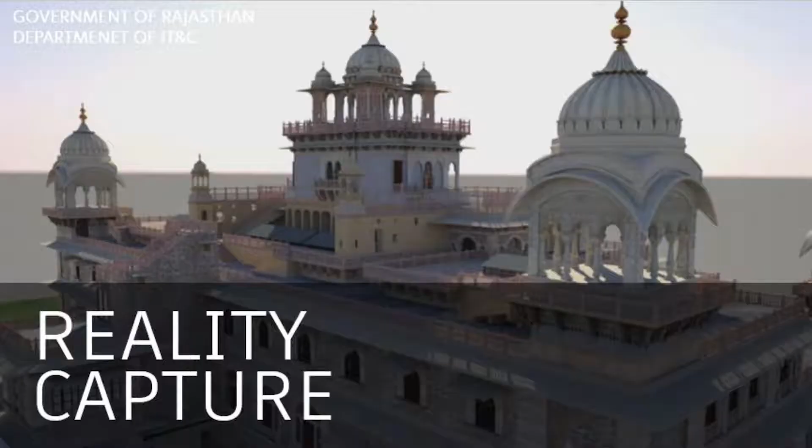Our lives became digital. From entertainment to communication to medical to bank, everything is online, everything is digitized. And since recently, we managed to also digitize the physical world around us.

The first devices were laser scanners. You know how it works - it spins and shoots laser beams in space. It hits the first surface, registers the XYZ coordinates, brings it back into the machine, and we have something called the point cloud. These machines used to cost almost $1 million, $600,000-$700,000. Now you can buy the most advanced laser scanner for $60,000-$70,000.

That's quite a democratization. Then we have a myriad of new types of scanners - there's Tango, there's Kinect, there's structured light, blue light, white light scanners. All of them help us digitize the physical world around us.

And then we have photogrammetry, the process of taking photos, simple 2D photos with your phone, with any camera. And if you took enough photos of an object or of a space, it automatically, through an algorithm on the cloud, converts into a 3D digital model.

Now, could you have modeled this statue? Of course you could, but you'd need to be an expert in Max or Maya. You would need a couple of weeks at least to do it. And it would never be the actual digital copy of the object - it would be an interpretation. This is the actual digital replica of the object that you took.

So we started with laser scanning in AutoCAD a couple of years ago, and it looked like this. It was black and white, it was not understandable, and it was killing AutoCAD. You put it in AutoCAD, and AutoCAD was going like this - it's like, what happened to me? I cannot work anymore, because it was not prepared to consume this type of point cloud and this type of data.

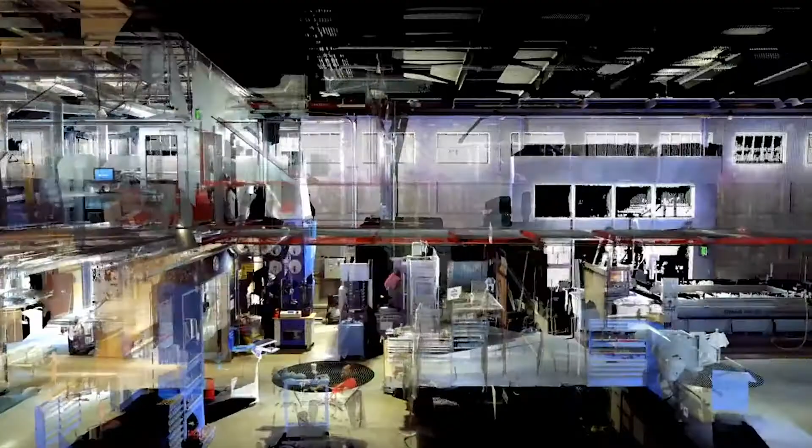That very object, that very scan, looks like this now. Both sensors have become better, but most importantly, the software has become better. And now we have the ability to use laser scanning and photogrammetry to capture either existing spaces, to represent the data in many different formats, to auto-register the scans. All these things that were really a pain to do before are almost a single-click thing.

And if all of that was not enough, we live in an age of drones. You can fly a drone without even thinking about it - it follows you like a dog without a leash. In the clouds, and basically we can fly it to capture just about anything.

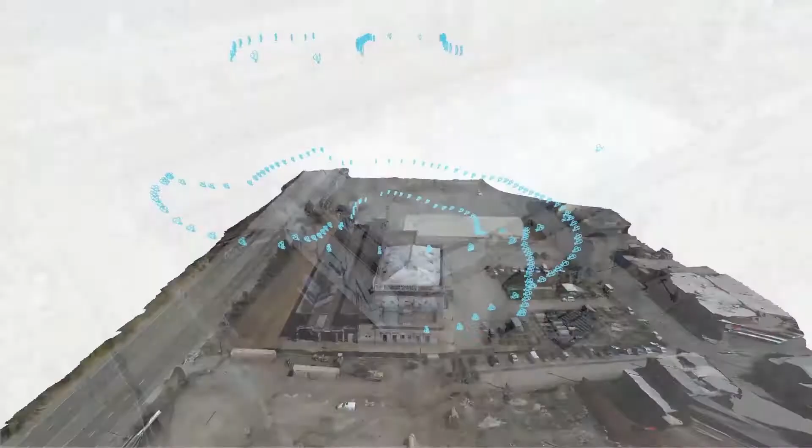Earlier, we had to remodel everything on the street, all the surrounding buildings, in order to start designing the new building. Well, now we don't have to. I fly two rounds of drone capture, and here is what I have. Now this is my starting point, and from here on, I actually focus on the task at hand and not on reconstructing.

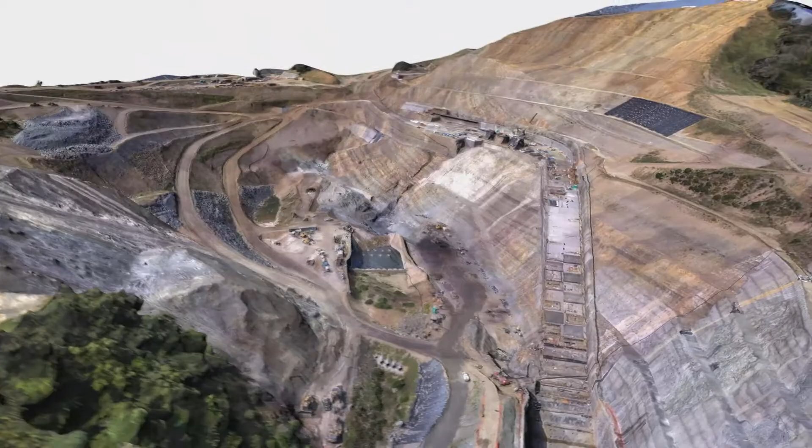Or if I'm in civil engineering, again, I fly the drone. I can calculate how much earth do I need to excavate, how the access points will be for the first trucks, etc. And this is not only interesting for when we plan new buildings.

It's also a good way to save our heritage. We're losing our heritage due to terrorist attacks, due to earthquakes, tsunamis, and it will be beautiful for the future generations to keep an archive of what we have.

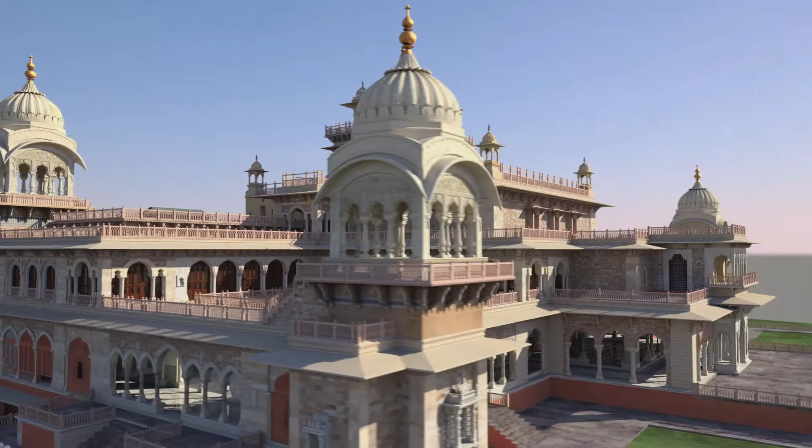The government of Rajasthan has started to do digitization of all their beautiful palaces. And their idea is not only to use this for saving an archive for future generations, maybe for future digital tourism, but also as a help to go towards smart cities.

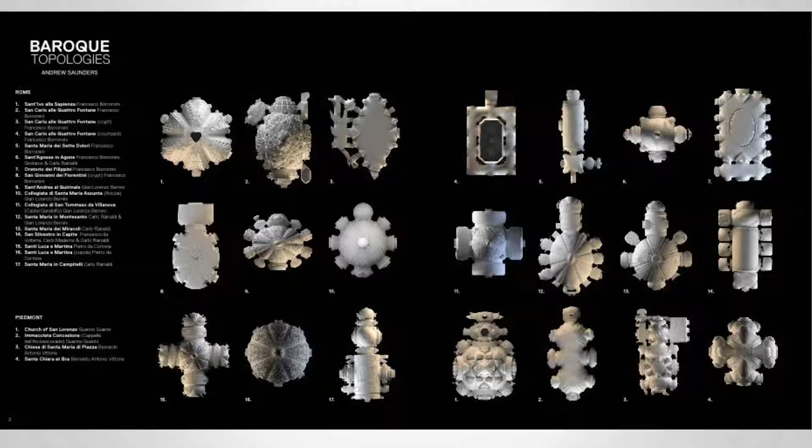In the gallery, you also saw a Baroque topology exhibition. I was working on this with Professor Saunders, who teaches Baroque architecture. If you're an architect like me, you know we learned all the complex architecture from floor plans and sections. But Baroque architecture is this beautiful combination of sculpture, painting and architecture, so it's not really understandable if you learn it from just sections and floor plans. So Professor Saunders said, I will try to use all of this technology to teach my students properly to understand Baroque.

They picked about 20 of the most important churches from the Italian Baroque. In Italy, they went with the students, scanned the churches, and created these unbelievably beautiful captures of the churches that you can experience online. You can look in detail.

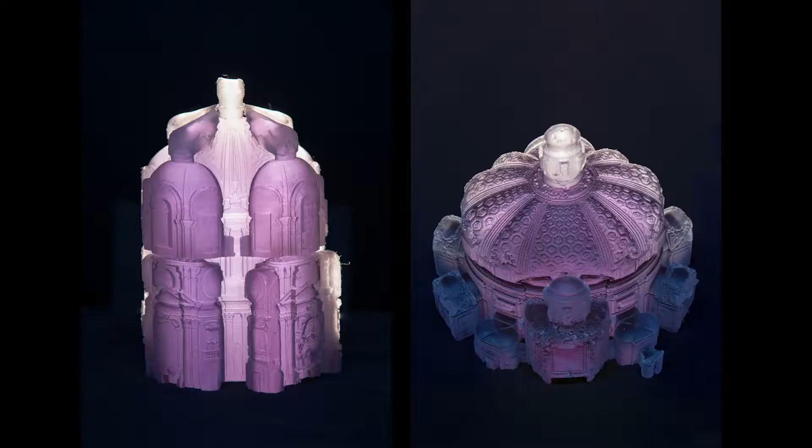We made 3D prints. Now, these are not prints of the outside of the church. Rather, imagine that you're filling up a church with water, then you freeze the water, and you break the church, and what remains is this sculpture. So this is actually the positive of the negative space.

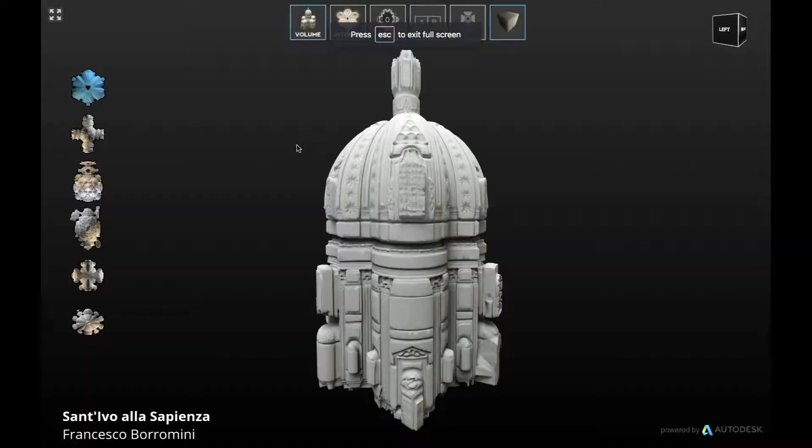The idea was that each student would take one of those churches to analyze, but the pattern of all of those churches together, in the future with machine learning, we can start to reverse engineer and understand what makes Baroque Baroque, what makes Renaissance Renaissance, et cetera. This is the reason why the digitization of the physical world is important. You can experience these churches from inside or outside in a web browser.

A couple of years ago, we started a project with the Smithsonian Museums, the biggest collection of museums in the world, with about 154 million objects. If you're somebody like me who goes to a museum, this is what you see, 1%. They simply don't have enough space to put all the artifacts, so they wanted to solve that problem. They wanted to expose everything they have that is hidden in archives underground, etc., and show it to the world. So we started to talk.

They not only needed digitization technologies, but a tool that would display the digitized objects as beautifully as in real life, not as in Second Life. And that's what we did. We built this web tool for them in which the objects are gorgeous.

Not only can you experience them beautifully, but you can augment them. This relief was not visible on the original statue because it was worn away by time. Once digital, we could deepen the relief, and the curator could, for the first time, actually read the story of Buddha on the digitized version.

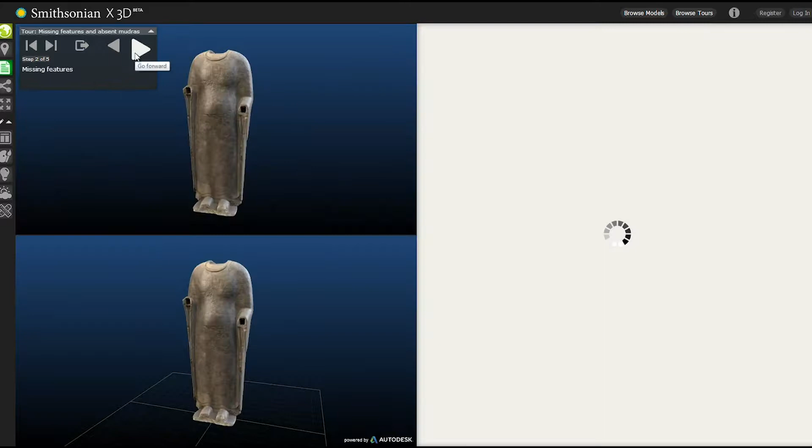This was a tool for the curators who spend their entire lives with these objects, to tell the story in a 21st century way, a way that kids today learn, because for them museums are this boring archival thing that they will just never go to.

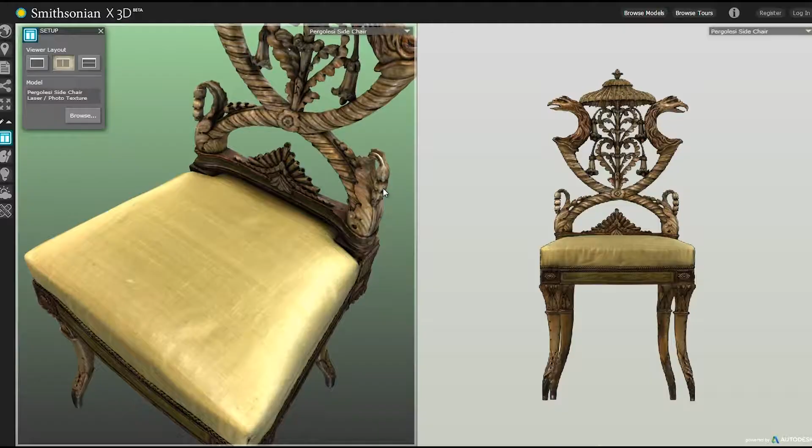If you're a teacher and you teach about mammoths, you can say, hey, open the Smithsonian mammoth, tell me how big is the leg, how long were the horns, etc. Or you can make some art, let's make a sticker for a t-shirt, etc. So this is a new way to educate, and these digitization technologies help us do that as well.

The final project we did with the Smithsonian was the digitization of the legendary Apollo 11, which usually is stuck in plexiglass. It's fragile, people don't want to walk in it or touch it, but it needed to be sent to another exhibit, and the Smithsonian team said, let's make sure we digitize this so we can have a good replica. Out of this digitization happened this. This is beautiful, digitized forever, and in a VR experience you can actually sit inside and experience it for yourself.

We actually had Michael Collins, who was the third astronaut who stayed in the capsule while the others were walking on the moon, come and put on the VR set and see how we today can experience what it was like when he was sitting in the Apollo 11.

Now, sensors that enabled us to digitize the real world are smarter than that. They don't only digitize geometry, they can digitize pretty much anything today. And here we're talking about the second trend, which is the Internet of Things and the sensors.

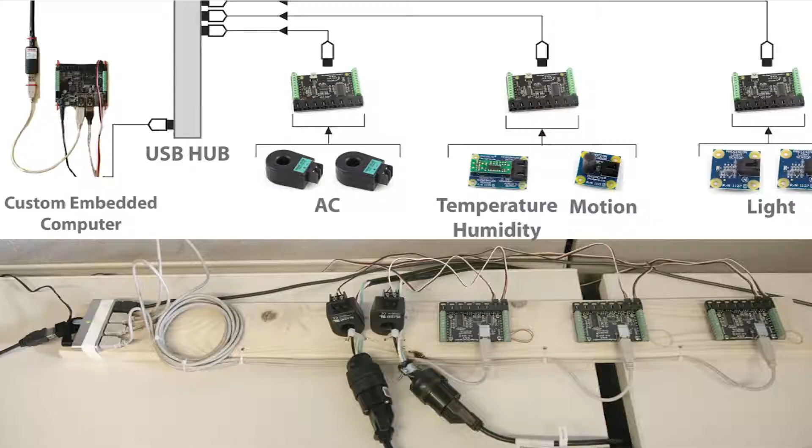We did this a couple of years ago as a test when it was very early. Nobody was yet talking about IoT. This was our Toronto office. We took every possible sensor that could digitize anything that is digitizable or trackable, like temperature, motion, humidity and light, etc. And we wanted to give it to the building so that the building starts to be smart, starts to be responsive, starts to give us feedback, starts to be alive.

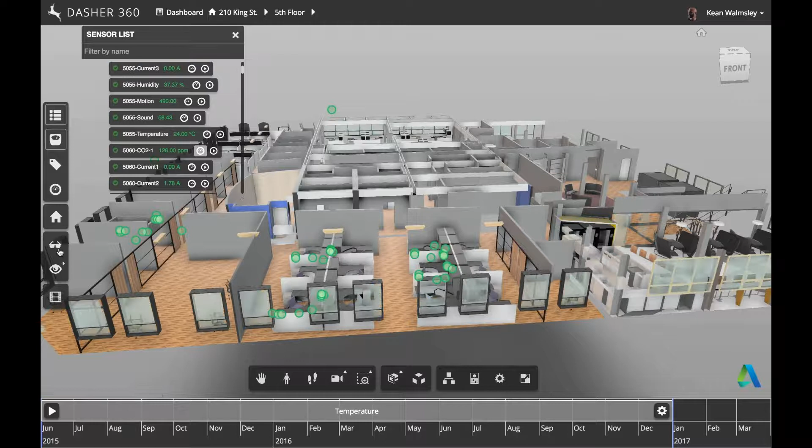So then we put that in a research project that we call Project Dasher, which is an interactive building performance visualization tool. Here you combine the sensor technology with cloud-based analytics, and it bridges the gap between design and performance. We could see both historic data as well as real-time performance data and understand how our building is doing. Was it really well designed? Was it really LEED? Are we really performing the way we should? And how are people using this tool, etc.? We can understand for the first time hot and cold spots and really have an insight into the well-doing of the building.

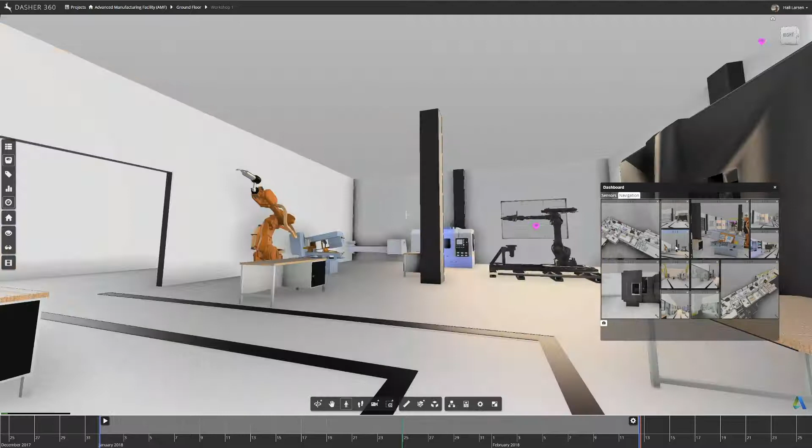We recently opened an advanced manufacturing facility in Birmingham, and we did the same, but in this case we have a digital twin of the workshop, and the idea is to track all the machines in a digital twin environment and do live performance of all the robots and everything that we have there.

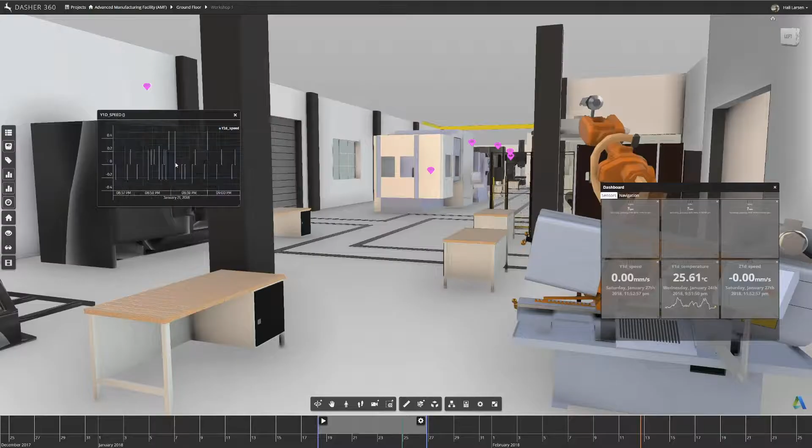IoT means connectivity. Connectivity in a way that we never had before. You connect the software with hardware, hardware to hardware, people with things. These two things create a lot of data. We digitized geometry, we digitized every single signal, audio, video, voice, motion, humidity. Now we have an abundance of data. But data means nothing. It's not an insight, it's just data. It becomes an insight when it's computed and when it's processed.

But to process a big amount of data, you need computing power. And that's the third thing. We live in a revolution. It's social, it's cultural, and it's technological, and it's called infinite computing. And it happens because of three things. Number one is the rise of computing power. Number two is the precipitous fall of the cost of that power. And number three, it is the democratized access that we all have today to that power.

Now, if you combine that infinite computing with the cloud, for the first time in our lives we have an opportunity to apply an infinite number of computational resources to solve some of the growing challenges that we have as architects, as engineers, and as designers.

So to put it very simply, I have a design problem or an engineering problem, and I take one computer to solve that problem. The computer will take 10,000 seconds, and it will cost me on the cloud 16 cents. Now with infinite computing, instead of giving my problem to one computer, I can give it to 10,000 computers at the same time, and they will solve the same problem in 1 second for the same amount of money. Being able to apply an infinite number of resources to solve problems at no additional cost is a first in human history, and this will change forever the way we're doing it today.

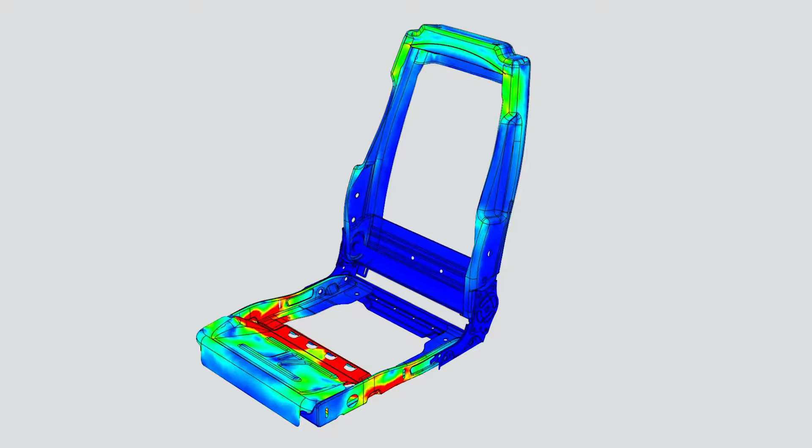So if I designed, for example, this car seat, I model it and then I send it to simulation to check if it works. After 7 hours, it tells me this zone, the red zone, it will break. So then I redesign, I change, I run the simulation again. Again it runs for hours, only to receive maybe a slightly better design, but is it an optimal design? No, because I was just trying to fix a little bit and to improve.

With infinite computing, what we can do now is, instead of sending just one or proposing one design at a time, we propose many designs at a time. And this is what brought us to generative design. Basically, generative design is not a product, although we do have a product now called Autodesk Generative Design. It's an approach in which the engineer, the designer, informs the tool of the goals. And the goals should be anything that is measurable. It can be size, it can be weight, it can be strength, it can be cost.

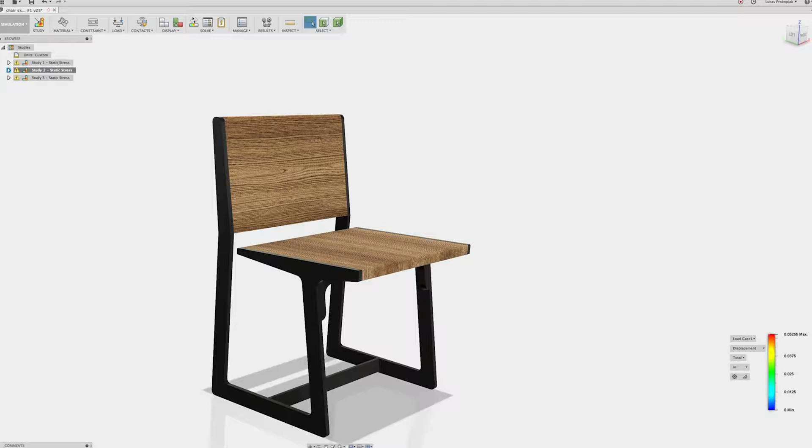Anything that you care for, you just define it as a goal, and then with the power of computation, the software, using often evolutionary patterns found in nature, is synthesizing geometry for you. So instead of designing the traditional way in which we use simulation to validate the design, we use simulation to design, to discover design.

This is about exploration. This is about creating so many options and variations within the solution space that is now open for the first time, beyond our biases, beyond our brain capabilities, and we can now see many options and understand the trade-offs. So what results is not only a design that is optimized, that uses less material, that obviously will cost less, etc., but also a design that we might have never designed ourselves. It's something unexpected, something that augmented our creativity. Now, why is this important?

So now I have this problem, and as a human engineer, I'm thinking how to solve it. So I'm thinking with everything I know about statics, about structural qualities, about materials, and I'm thinking of ideas, I sketch, and I arrive at 6 or 7 ideas. And I'm very proud of myself. I have a couple of options, they all work. What I'm not aware of is that throughout that process, I've been hit by human biases.

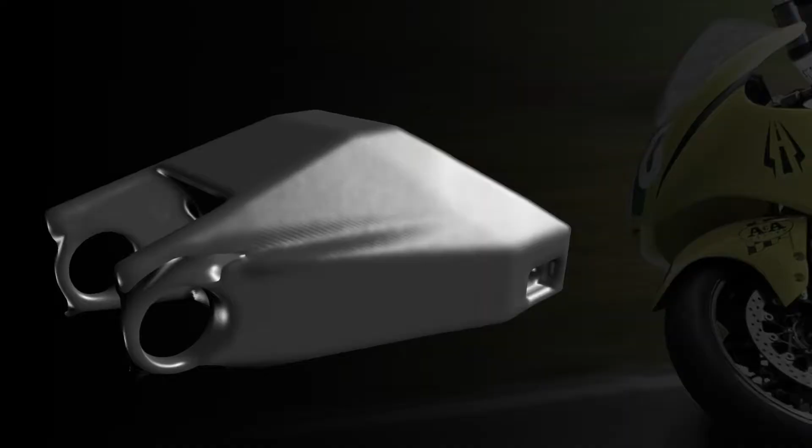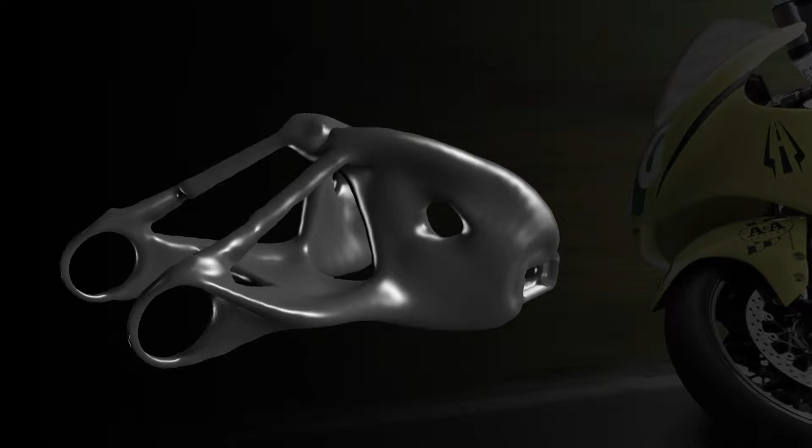We applied generative design. In this case, it's actually pure optimization, and this is very important to understand. If you start with a shape already, and you just try to optimize it, to reduce the weight, to reduce the material that you use, that's pure optimization. That's not generative design. And many tools out there that are pure optimization sell themselves as generative design. Generative design is when you start just from the goals and constraints.

But bear with me. We worked on this, and here, to your left, you will see the final outcome. It looks very organic, and it uncannily reminds you of a pelvis of a cat or a dog. And it's no wonder—this is what nature does. It always optimizes to use the least material, the least energy for maximal performance. So our object now looks very organic.

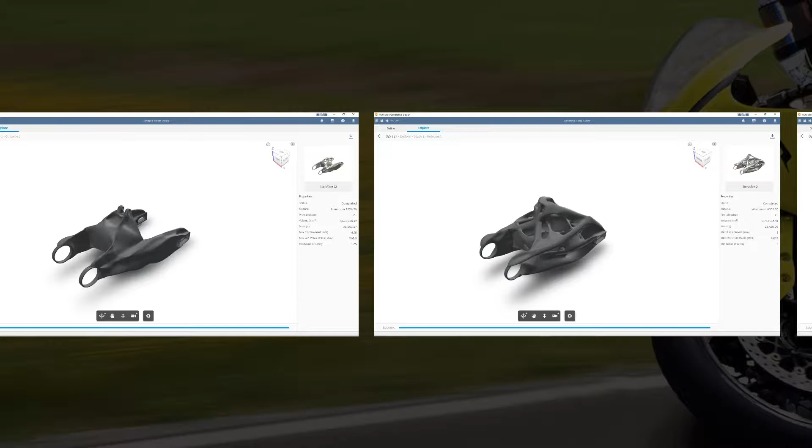But again, that was when we started with the design that they had already, and we just optimized the shape and the material. This is real generative design, when we just take the touching points, the connecting points to the rest of the mechanism, and then we start applying our rules, our goals, etc.

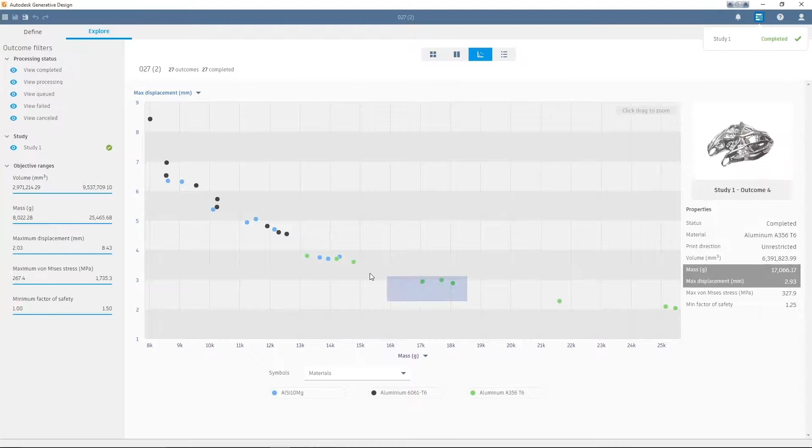The algorithms themselves design and synthesize the geometry within the rules and goals that you defined. Every time it generates something, it informs you exactly what the trade-offs are—oh, this one is lighter but more expensive, or this one is heavier but faster to produce, and so on. So you can decide as a designer what is more important for you. And this is what we arrived to.

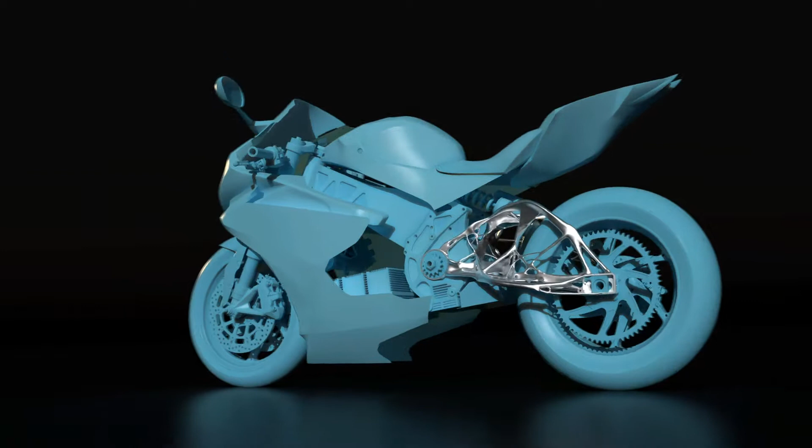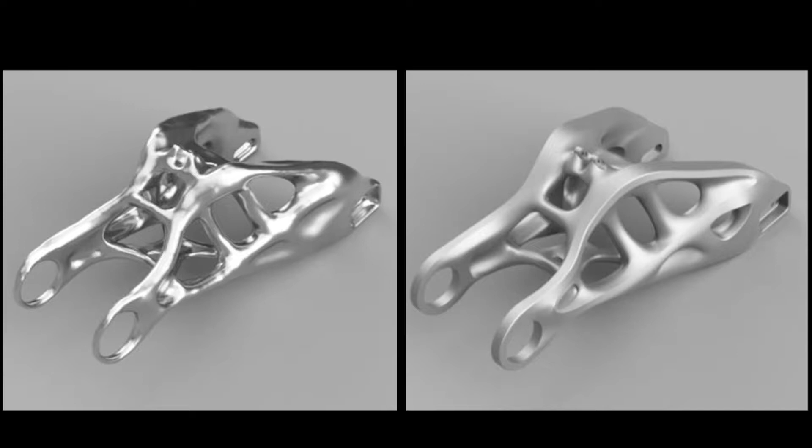Now you can say that looks really weird, and we're not used to these organic shapes because we are used to man-made geometries. We're very aware of that. In research, we also look at how do we not only 3D print these shapes—because at the moment they're only printable, you cannot machine them—so how do we machine them? But also, how can we give additional creativity and liberty to the designer so they take generative as an input and then control the output to look the way they want to.

You've heard us talk for a couple of years about Airbus. We actually worked with them for a while. They want to really change flying to make it more experiential, to make it better for the environment, and obviously to be more affordable for all of us.

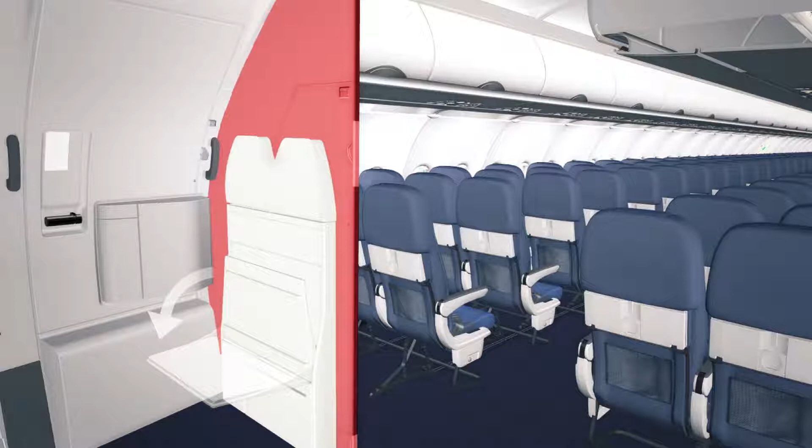And to do that, weight in an airplane is a very important thing. You have a lighter airplane, you use less fuel, the tickets get cheaper, you basically do not impact the environment that much. So the first project we did on generative design was with them, and it was this partition wall that I'm sure you have seen on previous AUs.

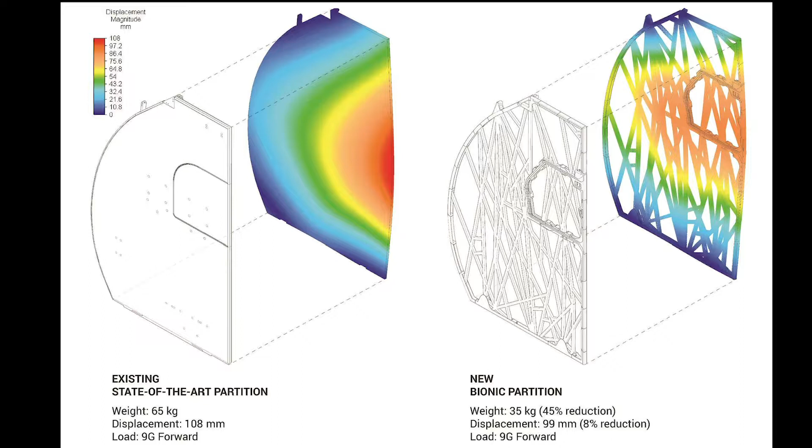The idea here was this was a solid partition. We used generative design to reduce the weight, and we arrived to a partition that looked like this. This partition is a 45% weight reduction, and it uses only one-third of the material.

Now the interesting thing—we always say we use evolutionary patterns in nature. What does that even mean? We didn't digitize the patterns, we're just getting inspired by them. In this case, we used two patterns, one from a mold and another one from bone structure.

The mold pattern, basically it's a slime mold, and how it grows, it puts these roots in space, and when a root finds food, it continues. But when it doesn't find anything, it dies, because nature does not want to use any resources that don't provide anything good. And that is something that we did.

And the other one that we used was the bone structure as an inspiration for these algorithms.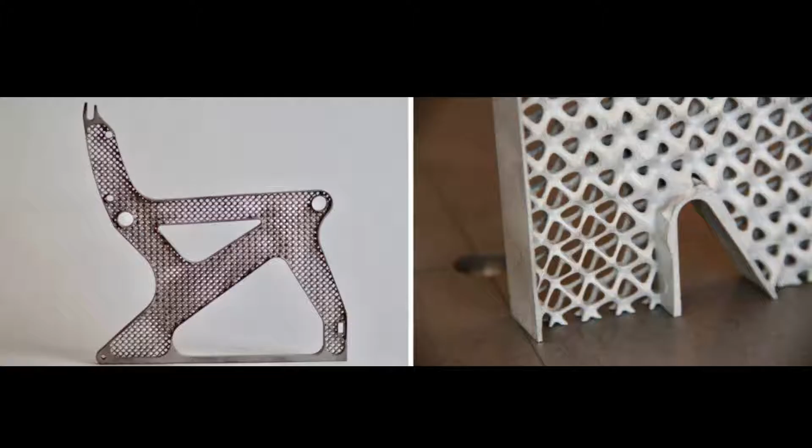So you're already flying in an airplane that has this, but now we continued working with Airbus to redesign the frames for the seats. Again, they're super heavy—you've sat on the plane, you know they're solid metal.

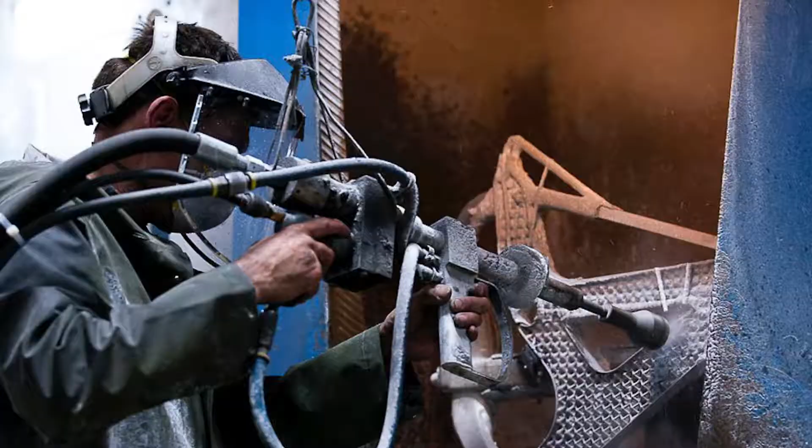In this case, we used generative design to optimize the shape and reduce the weight, but then when we 3D printed it, we did not use the 3D printed part as a frame for the seat—we actually used it in a lost wax casting process, and then cast it out of metal because it was cheaper.

So metal 3D printing today is still limited in size and cost, but we have an opportunity either to 3D print in metal or print in plastic, use it in a lost wax casting process as a negative, and then pour in a traditional casting process the shape.

The seat is now this light, and they calculated that if they apply this seat on a fleet of their planes, that would reduce carbon emissions by 126,000 tons, which is like taking 80,000 cars off the roads. And of course, there are over $200 million in savings over 10 years on those planes.

So this is not about implementing the technology for the sake of technology. This is real money, these are real benefits.

I'll skip this because at the moment we don't have time.

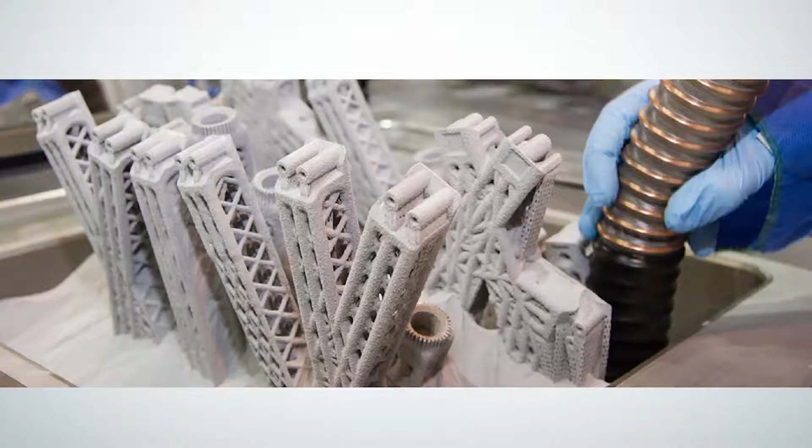Now this is something interesting. When we printed the partition, we realized how difficult it is for us, for our brains, to understand if it will fail—but the computer could. So while we could hold it in our hands, we could not hold it in our heads. Our brains only go so far, and this is why we need the help of computers.

Now, everybody says it's easy to talk about mechanical engineering, manufacturing and parts with generative design. What about architecture?

Both Uwe and Linnell mentioned our first project. We tested it on our own selves. We were moving to a new building in Toronto, and we wanted to see if we could implement a generative design approach of defining goals and constraints to make an optimal work environment. And that's exactly what we did.

We first surveyed all our colleagues. Oh, I want to sit next to the kitchen. I want to have a view. Oh, I want a dark corner. I want to be in a corridor because I want people to talk to me. Everybody expressed what their perfect working environment would be.

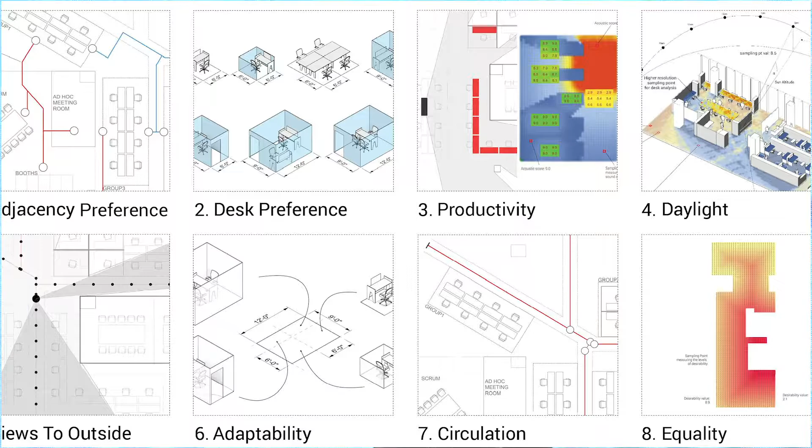After defining those goals, we evaluated the survey against the hard constraints of the building, because the building was already created - we were just talking about the interior. And these are the goals. Remember, goals always have to be measurable. That is the only thing you will need.

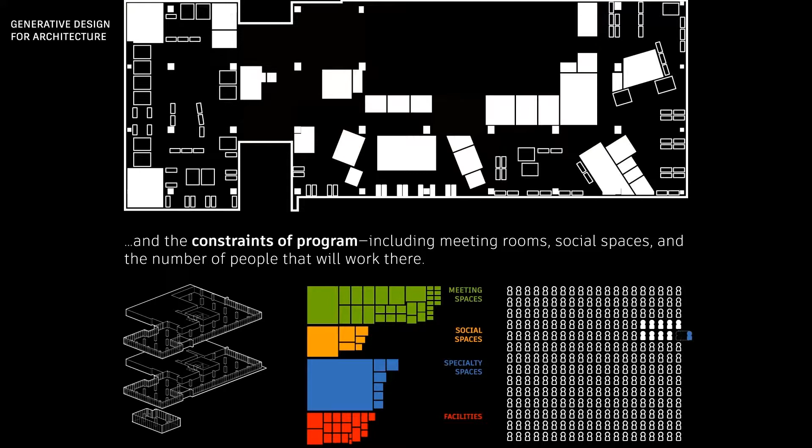So we defined the goals, and we let the system go. This is the power of automation. The tool generated, evaluated, evolved, and explored thousands of options.

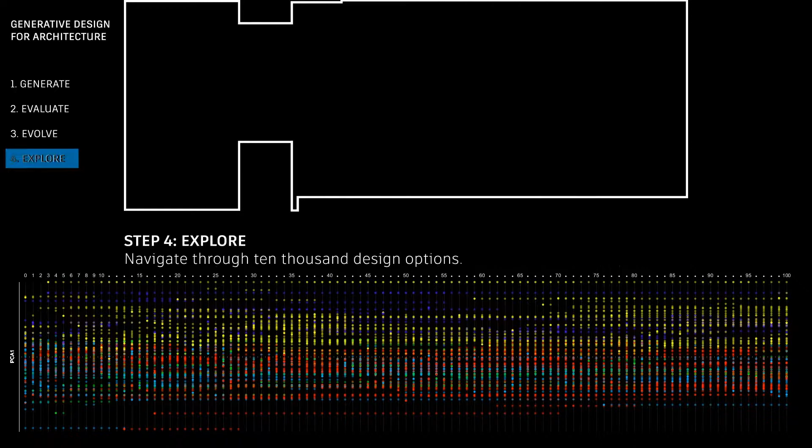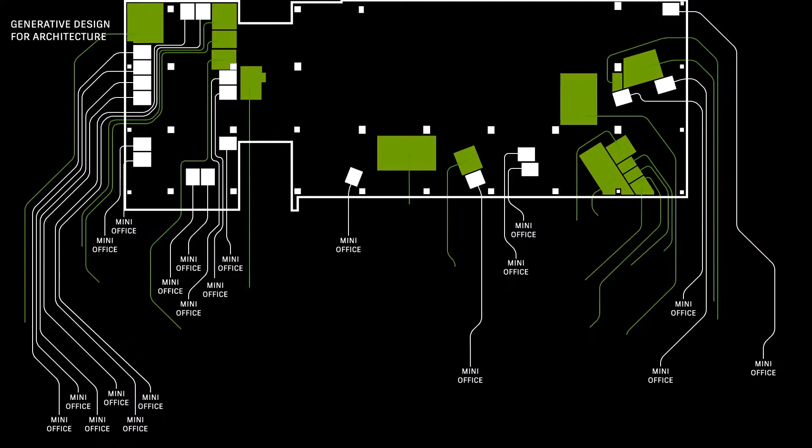Just imagine, I was an architect, I was designing houses. You have a family of 4, I design for you. You tell me, oh, my daughter wants this, my son wants this. It's already complicated to think of 4 people, let alone 300 people with so many different desires and constraints. We cannot do that - we can wing it, but we cannot scientifically do that. With generative design, we will be able to do that.

So we got options. We picked one that looked to us like it had the best trade-offs. And today our colleagues work in the office. They're very happy. And we will follow up - next year we'll tell you how they feel and what's happening when new people come and how the algorithm gets adjusted.

Now, with generative design, we create shapes that are almost impossible to do with traditional machining. And this is where additive manufacturing comes in. This is the next trend, where basically we call it additive because we only add material.

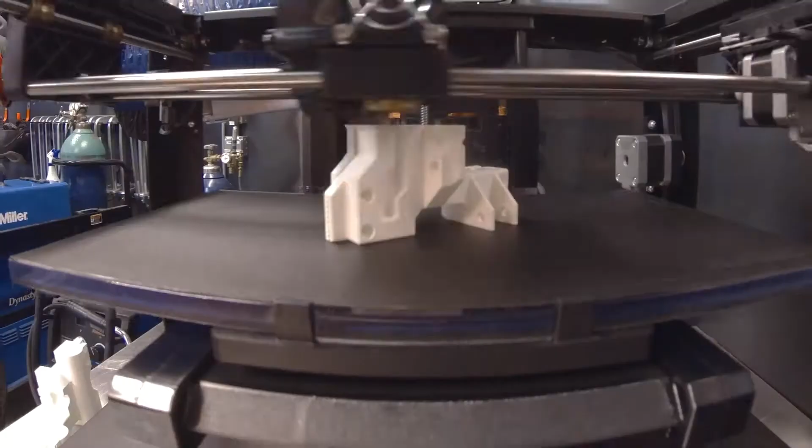I don't need to teach you 3D printing - you're one of the most advanced places about this. But there are some aspects of 3D printing that many people haven't realized. First, yes, it uses only as much material as it needs. Great, that's the first thing. The second thing is a 3D printer does not care if something is a straight box or a super complicated organic shape, because the printer just goes left, right, up, and down, and it prints whatever digital file it follows.

This can bring ornamentalism back. In design, in architecture, we were avoiding these shapes. We were avoiding being creative because we were complying to the tools instead of the tools complying to us. So for the first time, we have absolute creativity and freedom to do whatever we want.

When we started with 3D printing, there were only so many materials we could print with. Today, there are over 100 types of materials you can print with, and in my opinion, the biggest innovation in additive manufacturing and printing will be new types of materials.

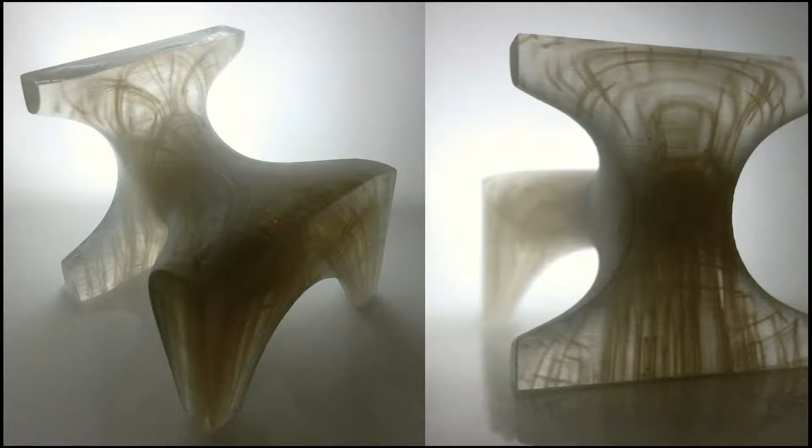Now, if a printer prints by dropping a droplet on every little spot, that means you can design objects that have, in the same material, different densities, different transparencies, different performances. That's awesome. But we don't know how to design for that today because we design the whole shape - we don't design every voxel, right?

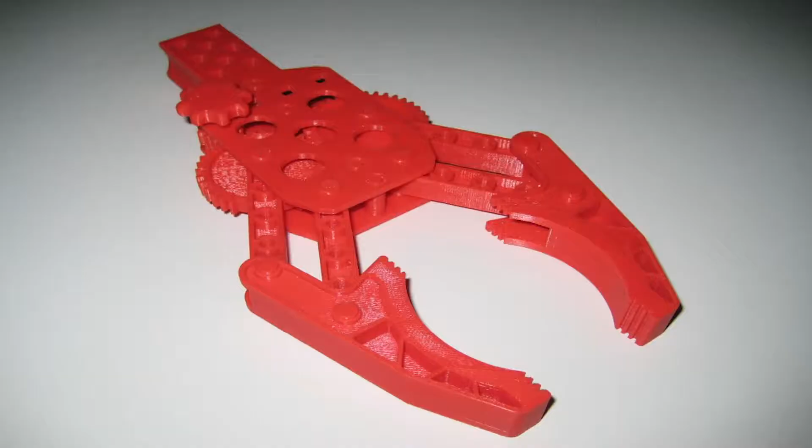Another thing is, if you design this in Inventor or in Fusion and it's a mechanism that works, when you print it in one go - this is made out of 20 parts, but they were not separately printed and put together. This was printed as a mechanism.

What does this mean for assembly lines in the future? What does this mean for manufacturing? This will definitely dramatically impact everything.

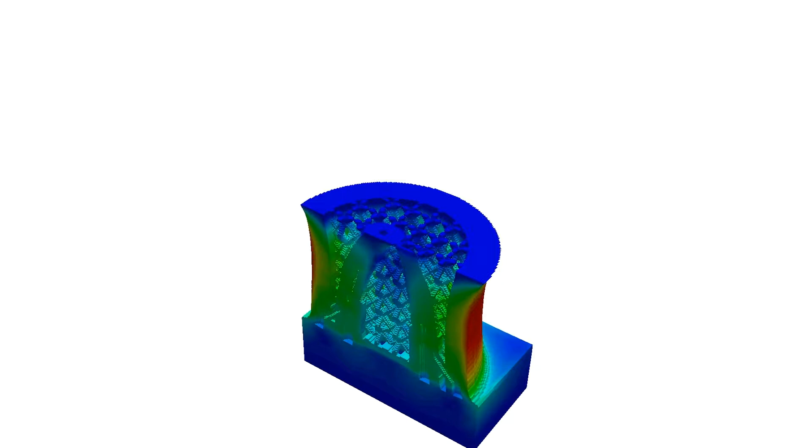So if all of this is so important, what are we at Autodesk doing about 3D printing? We have a set of tools called the Netfabb line of products, where we not only prepare designs for printing - where you can say, I need this geometry prepared, but also made hollow, because sometimes it's cheaper or you want it lighter, or to do smart nesting while printing, or to do simulation. Many prints, especially metal printing, are very, very expensive. I better simulate and see if my print will fail before I spend $20,000 on something that will fail. All of these are part of the tools.

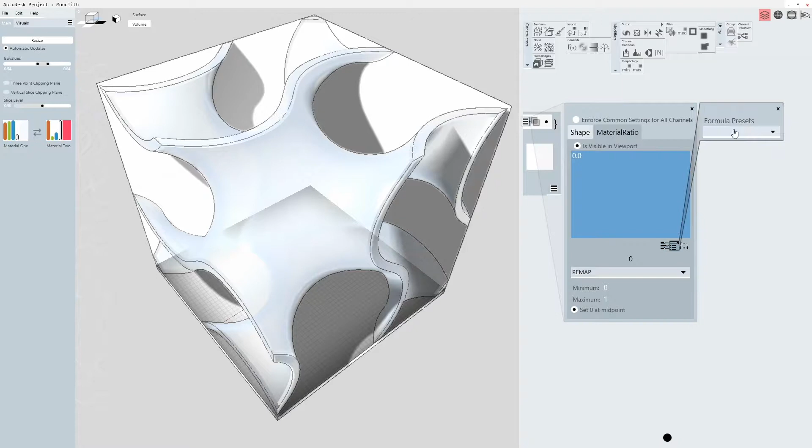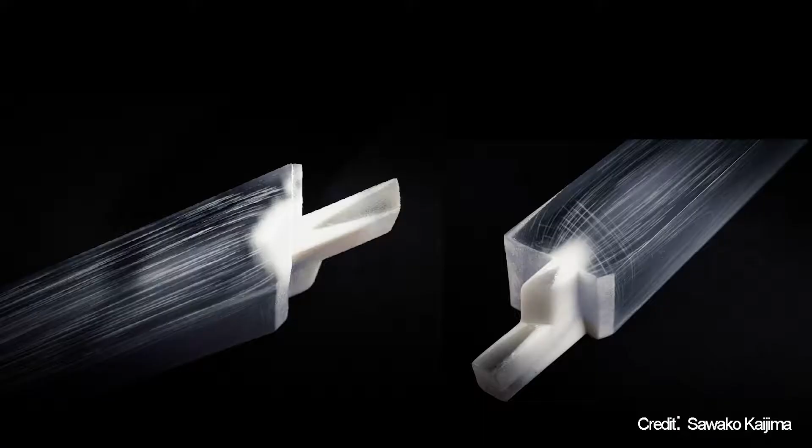In research, we experiment with how to design in a voxel environment so that every voxel can be a rubbery material, a hard material, transparent - because the printer can do that, we just don't know how to design for it yet. Imagine I broke my arm and I'm designing a protective brace. I'd like it flexible here because I'm moving, and hard where I broke my arm. Today these things are very difficult to design. So in research we look at designing objects with different density, color, transparency, and non-linear, non-uniform behavior, so you can design beautiful things and print in one go something already designed within.

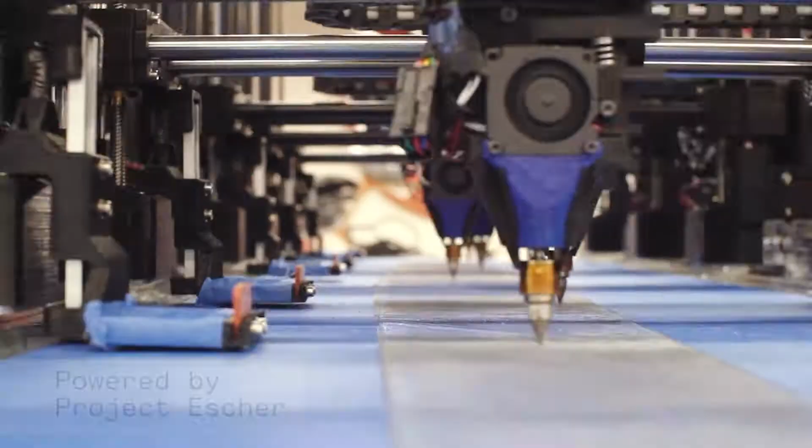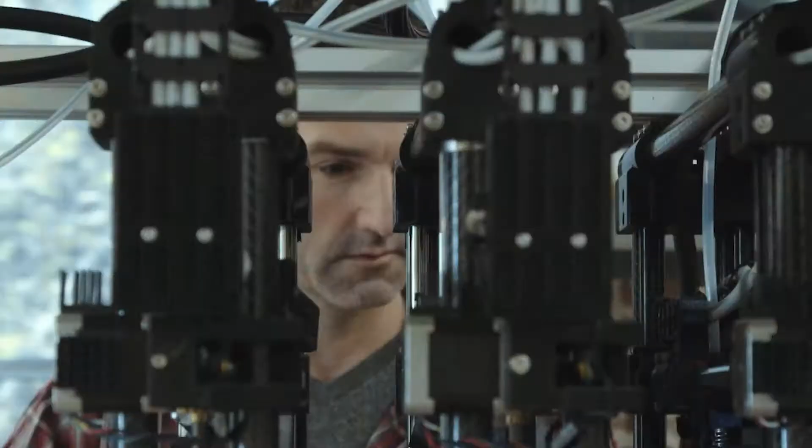Printers today print small things, they print slow, and they're expensive. We want big, fast, and cheap. So we do a lot of research on collaborative fabrication - collaborative printing where multiple heads print at the same time so we can print big objects. Lots of what I'm showing is Autodesk research - some we'll continue, some we're experimenting with and validating. This was one of those, just to see where it can go, because in the AEC world we'll need large scale if we want to move to 3D printing.

Now this is one of the more interesting things about additive manufacturing. I have a colleague, Massimiliano Moruzzi, one of the smartest guys I've ever met. He believes we should not be using aluminum, steel, or concrete - bad materials - and he believes in composites. There are composites we can build today with much better performance that aren't bad for the environment. He helped Livrea 3D print an entire yacht, printed out of polymer composites in one go without supports, using a robotic 3D printing arm. The bigger the scale, the more robotic 3D printers become.

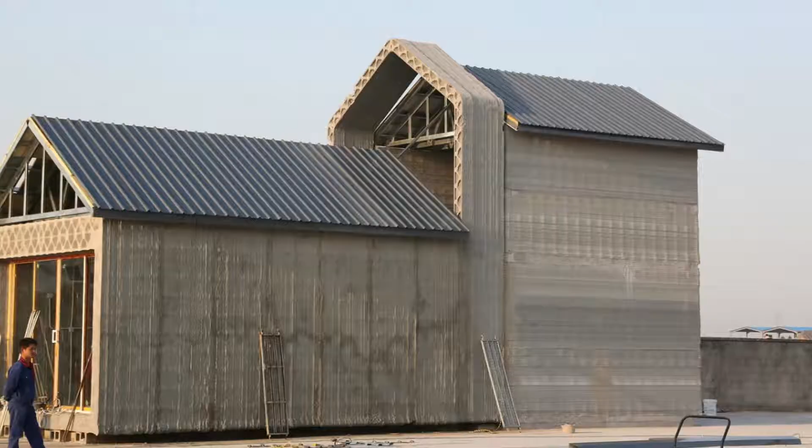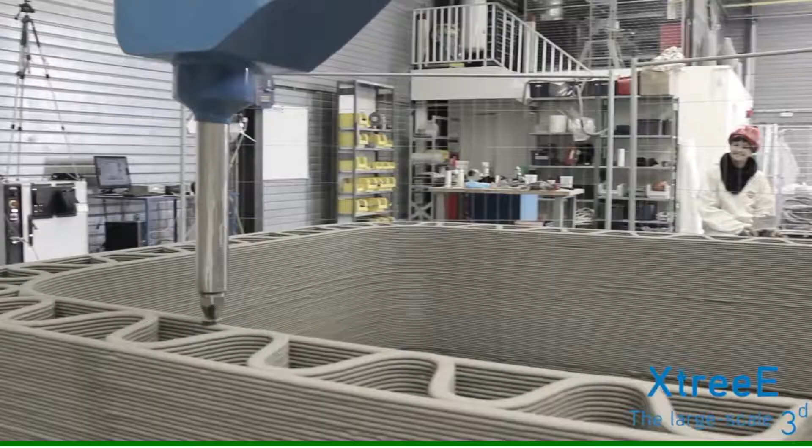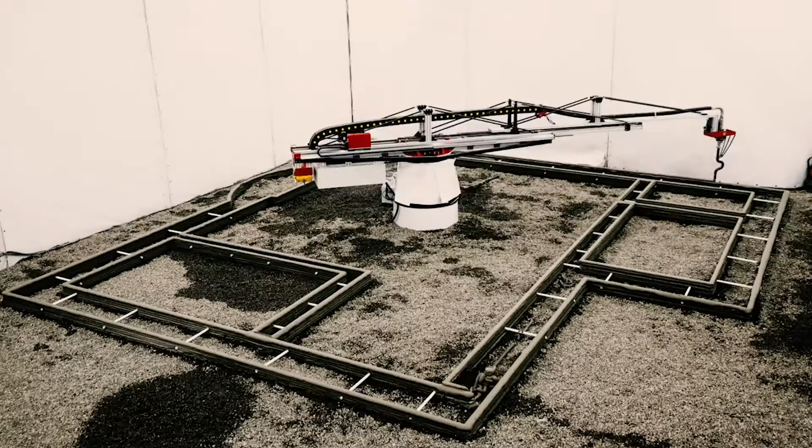In the world of architecture, Professor Khoshnevis, more than 15 years ago, talked about contour crafting - 3D printing for buildings on planet Earth or on Mars. His students, a couple of years ago in China, built the first low-cost housing at $5,000 per house, printed in 10 hours. Not bad - it's still rough, but you can finish it. We're going in that direction, and it's getting better. Now we see many robotic and 3D printing companies trying large-scale building printing, like APIS saying they print buildings - all more robotic because of the sheer scale. But the principle is the same: you have a nozzle, you have a material, it goes left and right and deposits the material.

I mentioned the magic word robot, and we cannot imagine any future without robots. So that brings me to the next topic.

How many of you know where the word robot comes from? Yes - in a play, robot means a servant, in the Roman... you're very right. Karel Čapek, a Czech writer, wrote a play called RUR, which first uses the word robot. In my language, rabota means work, but robotnik means a slave. Don't forget, we created robots to be our slaves. We shouldn't worry that they take our jobs - we should worry that human beings spend their entire lives doing work that can be done by a machine, because none of us enjoys that, but it's not pretty.

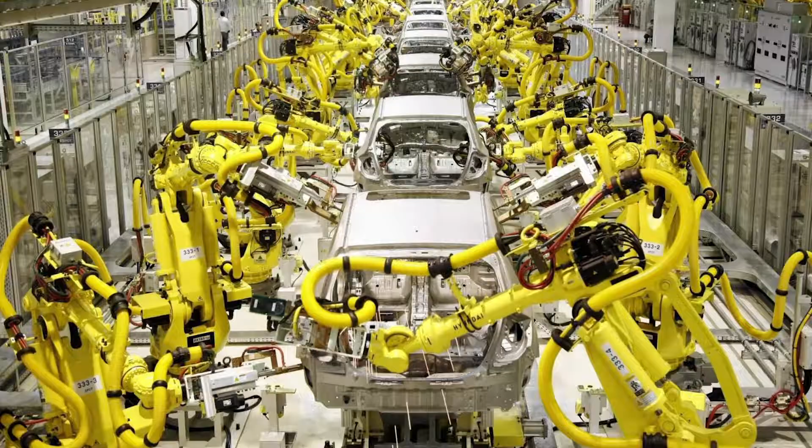So when we talk about robots, when we try to imitate one, we do this - constrained movement. When we say somebody speaks like a robot, what does that mean? Somebody not very emotional, just automatically repeating something. It's constrained, repetitive, non-emotional, not understanding context. That's exactly the problem with robots today - they've been so overly optimized for Six Sigma that they're completely inflexible.

Not only do they have no idea of the environment, but they've been hard-coded to do one particular thing. This is a big problem, because if I want to change the robot to do something slightly different, I have to reprogram it, and that's usually done by specialists. Imagine you have a car or any object, and customer feedback says something doesn't work well, and you want to improve that product. To do that, you have to stop all the robots, recode them, and then start a new production line. Nobody can afford that, so companies don't improve products even when they know they can, because reprogramming the robots is the bottleneck. Also, robots have no idea of the environment. That's why we keep them in a cage—if you get close to a robot, it doesn't know you're there, it can hit you.

These are the things we're looking at in Autodesk, because many people ask why we're even talking about robots, what is Autodesk doing with robots? Let me explain what we're trying to do. We're trying to do two things. Number one, can we develop a better way to talk to robots, to coach them, to interact with them, so that many more of us—not just rare specialists—can make them do something.

We started very early experiments where just with a normal movement of my hand, I can make the hand of the robot move. That's easy, right? You don't need to train anybody to do that. We had someone we call Madeline the robot Tamer—she was an artist in residence at our Pier 9 facility, and she was doing wonders. You really forget it's a robot; you think it's an animal responding next to her. It's really about how we create a natural language to interact with them.

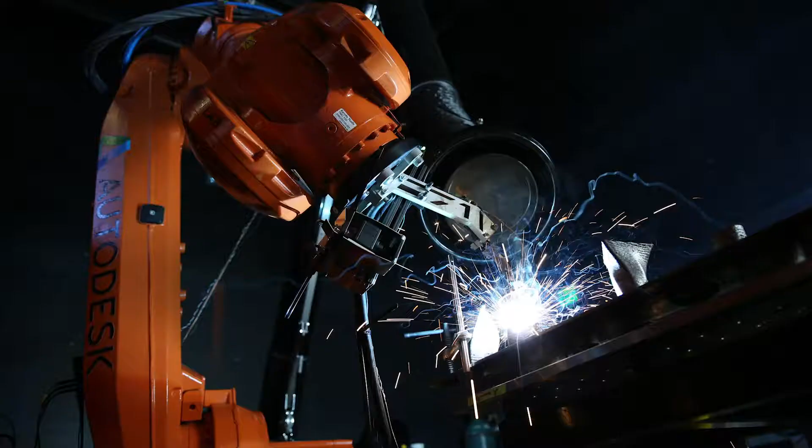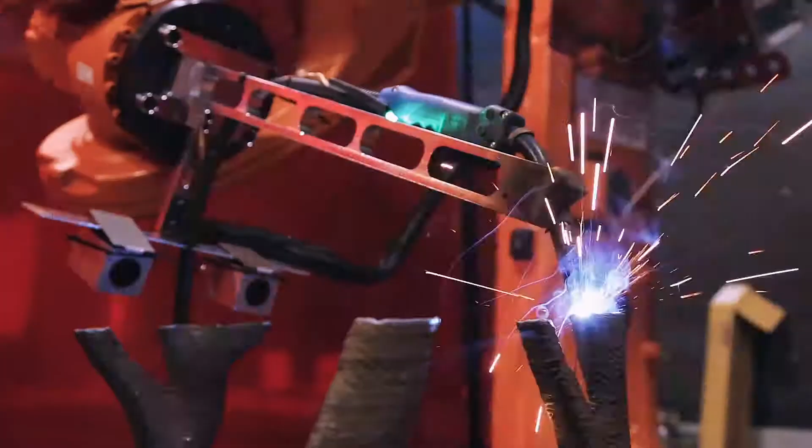Our first project—I believe Linnell mentioned this—this is the first robot we worked with, called Ash. We wanted Ash to become a 3D printer, because as 3D printers are limited, we wanted Ash to print that beautiful chair we designed generatively, but large scale. So we equipped Ash with a MIG welder, so it became a kind of robot welder that can deposit molten lava and print like a printer.

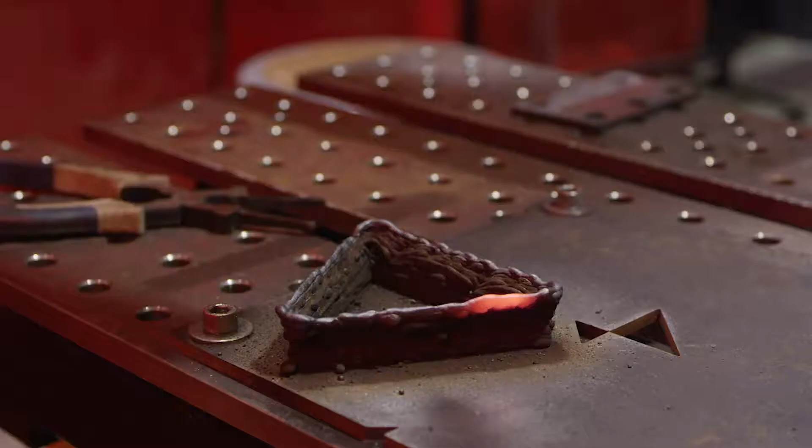We gave Ash eyes to observe what's happening—it actually has a laser. Why is that important? Every time it deposits a layer, the laser passes around and looks at the deposited layer. If it sees a mistake, it recalculates how to continue printing in order to get to the object you really wanted. It can learn from that closed loop of information and improve continuously. So the robot learned how to print, and learned how to teach itself to print better. And here is the chair.

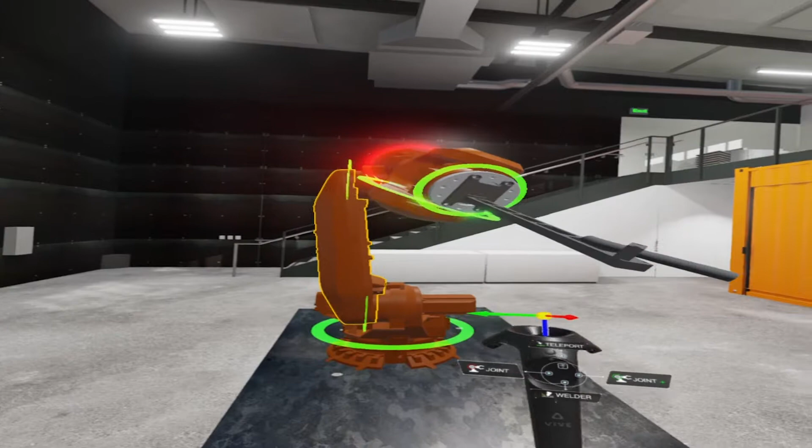We did something else with Ash—we wanted to enter its world and control it. So we created a full-scale virtual environment where, with the joystick of the VR set, we could actually control it. Why? First, when planning some activity, it's easy to see if it will hit something, how far it needs to go, etc. You can see how totally easy it is. This is really how we think we might be able to teach robots in the future and experiment more intuitively with them.

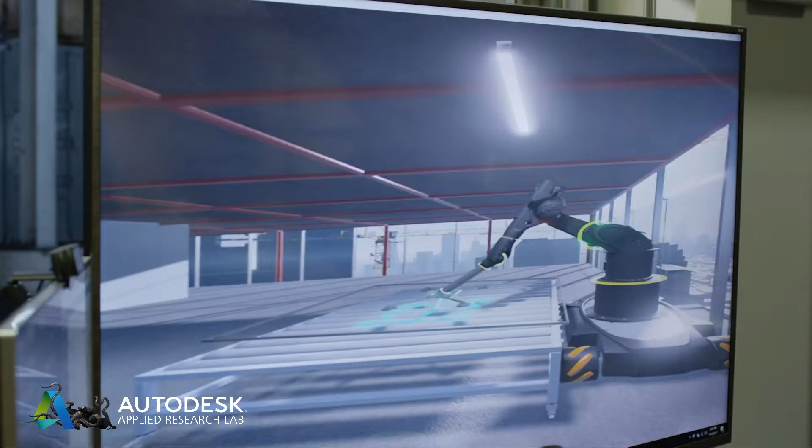For the last AU, we created a virtual robot that can recognize curtain wall panels and guide their installation on a construction site. You understand tall buildings better than anybody—you don't want to be the worker on the 150th floor installing curtain walls. It's dangerous and inhumane given the temperatures or weather conditions. So today, through VR sets, we can actually control the robot and do this.

In the future, we hope that through human interaction via VR sets, we're gathering data that we can use to train a machine learning system, so the robot can do it itself, while you're in the office just controlling whether it does it well. And I said the magic word—machine learning system.

What does that mean? Machine learning is really the science of getting computers to act without being programmed. All they need is a bunch of data.

We feed a bunch of data to a neural network, and it starts to look at patterns through the data and starts to learn things.

That means for the first time, we can have machines do complicated things without needing to program them. Machine learning is happening already. You're all users of machine learning tools. If you're using Netflix and have movies recommended, that's machine learning. If you're writing in Google and you have autocomplete of a sentence, that's machine learning. Natural language processing, when you talk to Siri, that's machine learning.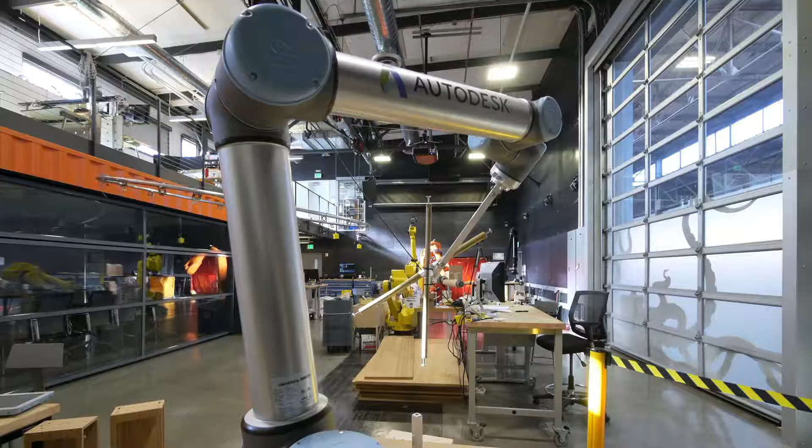So we took another robot. This is a smaller robot that we call Bishop. And we introduced Bishop to the disorderly world of Legos. We wanted Bishop to recognize Lego bricks and assemble them. And to do that, we equipped Bishop with a camera and with an actuator. So Bishop understood that it has eyes to see and a hand to grasp.

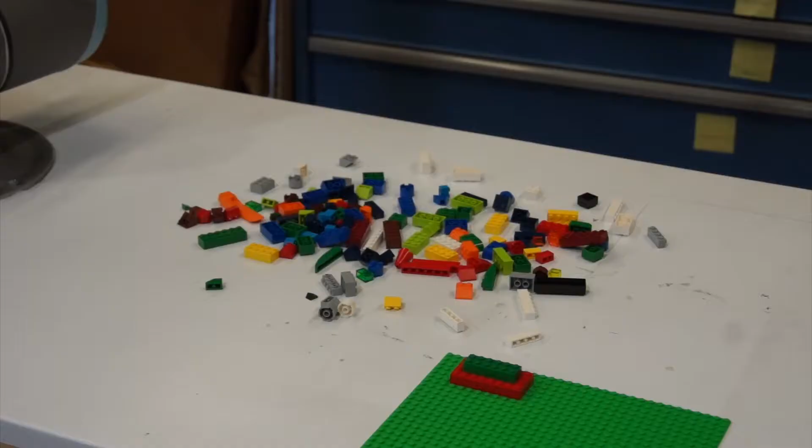And after a couple of rounds of data feeding through the machine learning system, it kind of understood how to find a brick, catch it, and put it. And we were very impressed. But Bishop was learning very slowly.

So we had a choice: either buy thousands of Bishops and have all of them learn and then gather that experience and learn some bigger truth, or create a simulated virtual environment for Bishop in which we basically replace what it sees in the physical world with simulated bricks and do all the learning in a simulated environment.

By decoupling the learning environment from the physical world, we decoupled time. Now the robot was learning in computer time. We left it one night, and in one night it already understood not just to pick however, but to reorient itself and then pick the best position of the brick. That's amazing. Can you believe that all of this, which would not even have been possible to code, just coded itself in a couple of nights?

That's crazy. These are all the simulations that it did in just one night. So here is Bishop now. He's much faster. And what's important here is, it's not like the previous robots where the bin has to be here and they have to drop here. If the bin moves a little bit, the robot is confused because it's only hard-coded to take from here to here. With Bishop, if I push the brick somewhere else, he doesn't care, because he knows wherever there's a brick, I'll find it, and wherever is the plate, I'll put it.

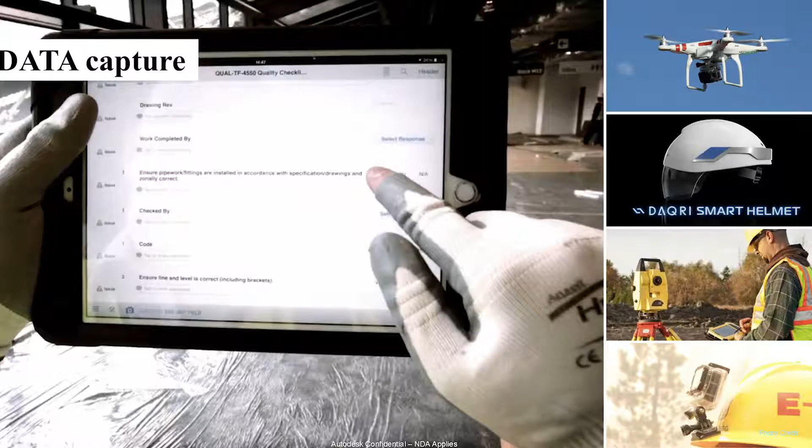We looked at all the types of data that workers on advanced construction sites capture and input into the products they track progress with, and created something called BIM 360 IQ. We realized there were 24 million reported issues on BIM Field, and we asked, what if we could learn from this data? We contacted customers, and about 40 construction companies worldwide are participating, sharing their data with us.

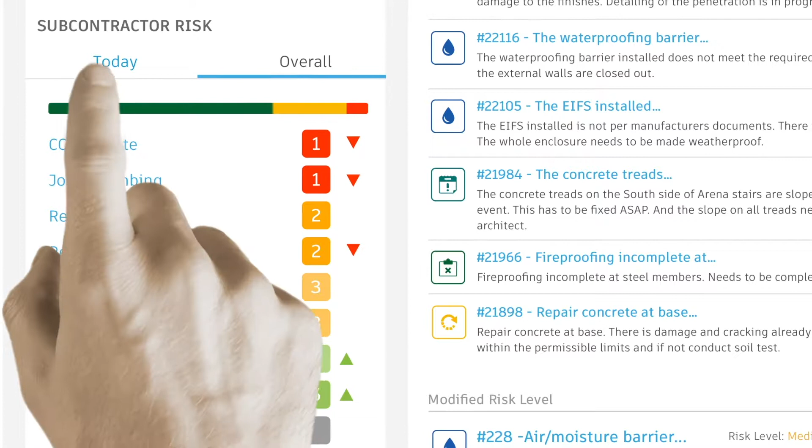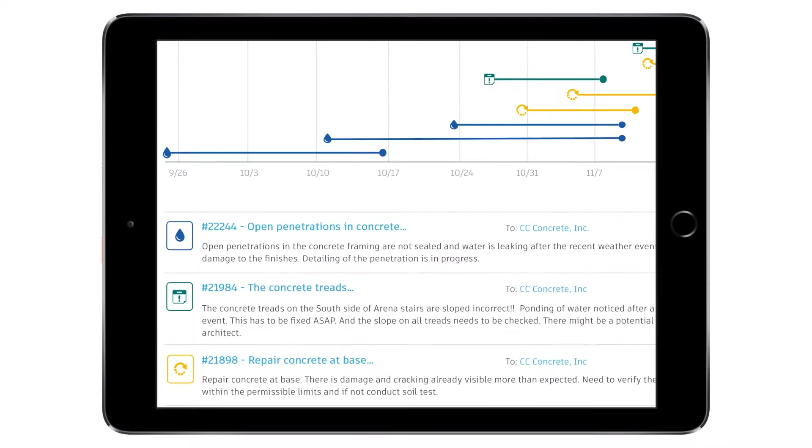Out of that data we created a system that, according to them, works at about 98% accuracy and can predict risks on a construction site. Imagine you're a superintendent, you come in the morning and see about 300 issues. You can drill down into any issue, like concrete issues or water issues, and assess them. The system classifies information from historical knowledge and knows a water issue is a big thing, so it will surface it. Since we're still working on this, sometimes it doesn't predict correctly, so we can amend and fix what was proposed, saying this was not a water issue, it was something else.

This works like a charm, with 5-6 machine learning filters the information goes through. This is learning from past experiences - we crawl the data, correlate different types of data, and are able to predict.

If you're an owner with multiple projects, like 36 projects in this case, you can see all of their projects and the state of risk in those projects, whether they're delayed, etc., and then drill deeper down like the superintendent and start from zero.

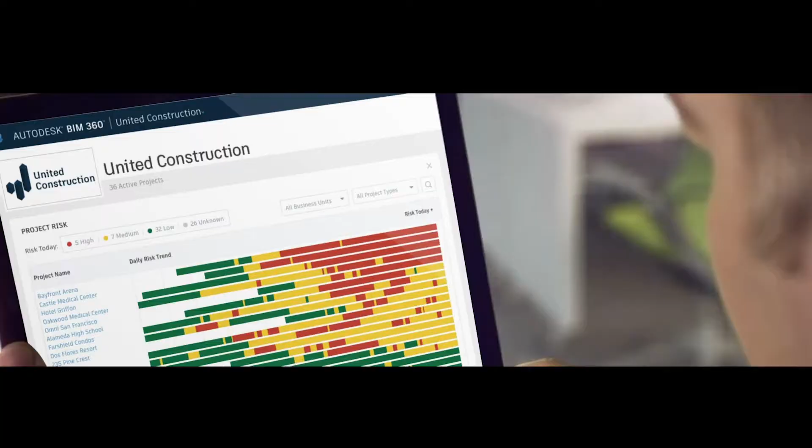On a construction site, on big sites you also have 200, 300 subcontractors. Wouldn't you also want to know how the subcontractors are doing? Every day you can tell which subcontractors are delayed or have issues, but you can also historically keep track of which subcontractors generally performed well or not.

At the moment we're doing this with pure text input on BIM Field data, but we're augmenting this with other types of inputs, photos and videos, and any information that can help correlate the data and bring insight. For example, if we use computer vision, we can detect a darker spot in front of a window - that must be water - and immediately do a real-time alert.

There is a water issue, it brings it into BIM 360 IQ, and the superintendent knows how to deal with it. We can also do risk assessment on safety - if this is a tall building and there are workers there but no railing, the system will notify that. Uwe showed some of our partners on Forge developing solutions for this.

One is Smartvid.io. It runs video on site in real-time, classifies the data through machine learning, and analyzes in real-time what's going on. In this case, it looks at the humans and checks if they're in safe conditions.

We also have Forge partners like Connect Tech, who basically allow you to access current BIM data on-site directly, through an AR/VR environment. At the moment they're manually adding data, but we can actually add data with automation and machine learning in real-time. For example, through XR or mixed reality you can see that a bolt is missing - that's a safety issue - or there is mold here, etc.

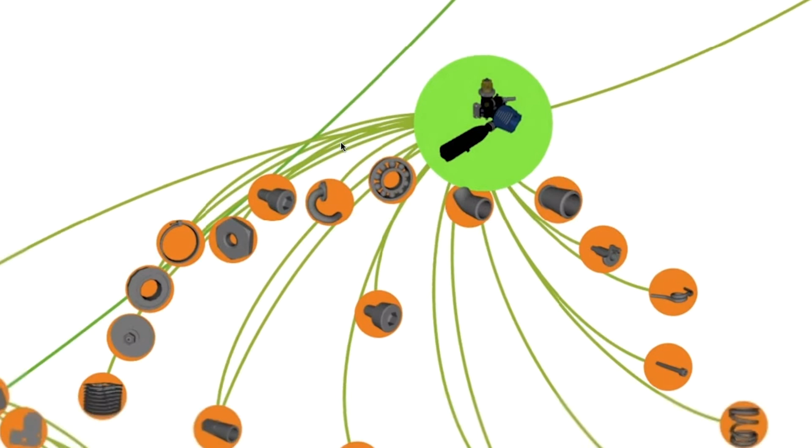It's a shape-based search that understands the shape, but also the topology, and it enables you to understand how your projects are constructed. So this is the whole graph of your projects - at the moment there are hundreds of projects. It visualizes every project, and all the parts and sub-parts in that project. Imagine having a knowledge graph that connects every one of your buildings with every one of the components used in those buildings.

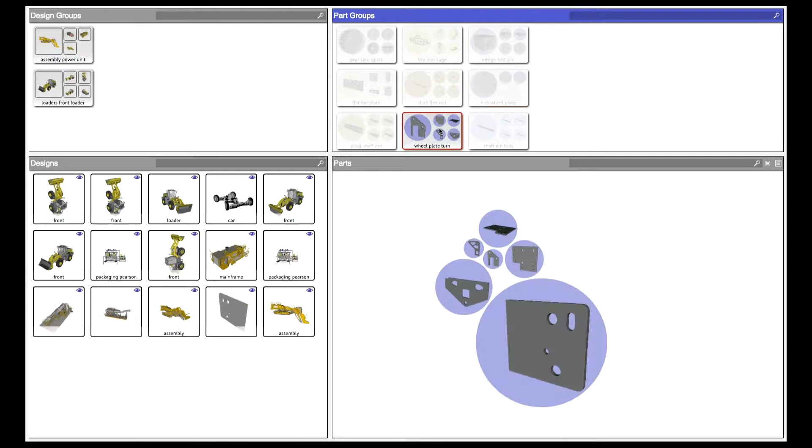In a very early research phase, this looked like this. Here are all my projects. I pick one, and it shows me immediately all the parts that I have, and I see them visually. But if I pick one of the parts, then it tells me where that part was used, in which projects. So it can go - you start with a part and find it across all projects, or the opposite way.

So then in the next stage we said, either through search or in a design phase, you have an object and you say find similar. This is smart search, this is find similar in manufacturing. If you design something twice, you're ordering it twice, but it was probably the same object. We can find duplicates or almost similar duplicates.

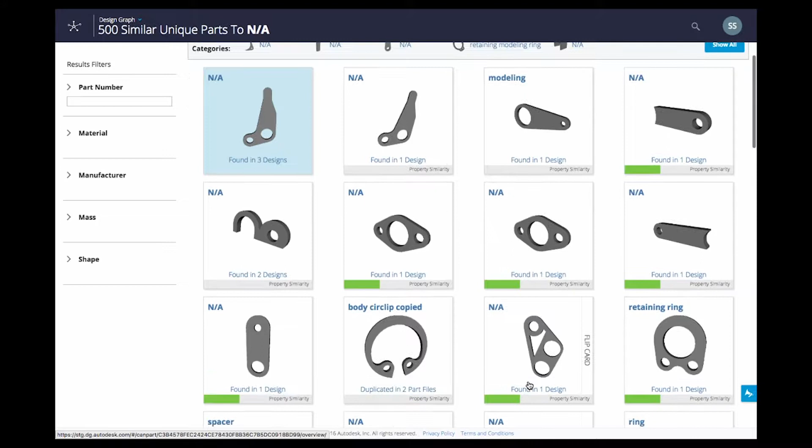But smart search is just the beginning. Where this is going is predictive, assistive, autocomplete for design. So one day, when you design something, it says, oh, you're designing this? Well, this usually goes with a bolt. Oh, and if you use a bolt and this, you're probably designing a bicycle. And it completely reconstructs the tools it offers you, because it understood from the parts which subsystems you can build, and from the subsystems, what you're actually building.

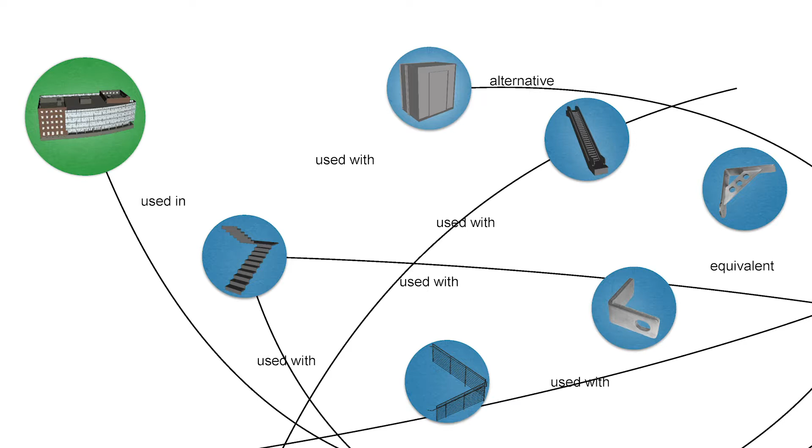And when you look at these components, the lines that connect them - that is the knowledge, that is the graph. This is what I call exformation. This is where we lost the information - how did we arrive at this? It's not captured anywhere. But the machine learning system finds the patterns, finds the relationships, and basically creates an ontology of what makes a chair, what makes a building.

So to finish, I'll finish with creativity. Where is this all going? We're hearing of computer-generated music, computer-generated pictures. So a couple of years ago, there was a company, End Cue, who created a fully artificial intelligence-made movie.

Basically, the artificial intelligence system created the script and directed the movie. It was only real actors that were acting. The movie was intense, hilarious, and absolutely unwatchable. I do recommend that you watch it - it's on YouTube, it's called Sunspring.

While we're always joking about that one, there is something that we don't joke about, and it's a project you absolutely have to Google - it's called the Next Rembrandt. It was the most beautiful merging of creativity and technology that I've seen.

Scientists from the Walter Thompson Institute in the Netherlands decided to teach a computer to paint a Rembrandt. They fed the computer about 350 paintings done by Rembrandt that were digitized, and then they defined the goal: I want to paint a male that will be 30 years old, that will have a little bit of facial hair, that will have a hat, etc.

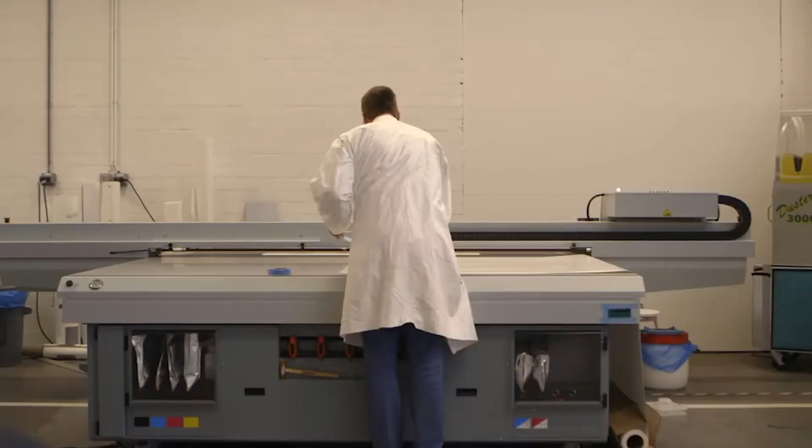They needed 9 months to feed information for the pattern to start understanding - Rembrandt was always painting the eyes like this, with a distance like that. When he was doing the cheeks, he was doing this. And in painting, we don't understand, but painting has a third dimension - when they want to emphasize something, the painters are adding more paint, etc.

The system managed to generate and to 3D print a Rembrandt painting. 347 years after Rembrandt died, there is a new Rembrandt that a curator could not tell was not painted by Rembrandt.

I invite you to watch it - it's on YouTube, just write the Next Rembrandt. It is the most exciting thing I have seen. And this is what will happen with design as well.

I have one video that is rather a provocation - it's not serving as inspiration. It might make you angry, it might make you uncomfortable, but parts of it we do believe will happen. I need the audio for this - I hope it will work.

Autodesk, I want to design a chair. Here are some popular chairs. Scroll through them and select some examples to give me an idea of the type of chair you would like. Okay, I'm making some selections now.

Just think about all the technology hidden behind this. All right, here are the chairs you selected.

Okay, combine all possible pairs between these 6. All right, there are 15 possible pairs. I am morphing the form between all pairs, generating a large range of combinations. Here are 5 design possibilities between each of the 15 pairs, for a total of 75 possible designs.

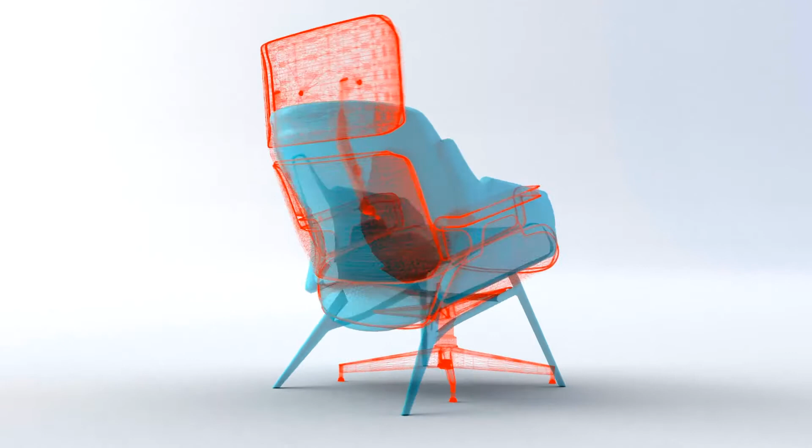All right, matching to the parameters of a known lounge chair with high user ratings for comfort. Show me a comparison of the two. Here you go. Make the chair look good inside this space.

Adjusting materials to fit in with the environment you uploaded. All right, make the materials look like this outfit. All right, here it is. Nice, save that version. Okay, version saved.

Show me 5 visually similar patterns to this dress. Okay, here you go. Zoom into this one. All right, here it is. Show me this one. Okay. Save those two. All right, 2 versions saved. You get the idea, right?

I watched the documentary of Konstantin Grcic, one designer that I like a lot. It was on United, and this is exactly how he talked to his human assistant. After the initial design, this is how senior architects in the firms I was working in operated. They were like, can you make that? No, make it like this. That's how we want to work.

Instead of holding a mouse and designing the same chair leg for the 300th time in our lives, so while the beginning might have made some people uncomfortable - wait a second, I'm a designer, you're telling me I'm just going to be a picker now - this can really be the future of personalized design, when a company that creates chairs tells you, oh, you can design your own chair and we're making it.